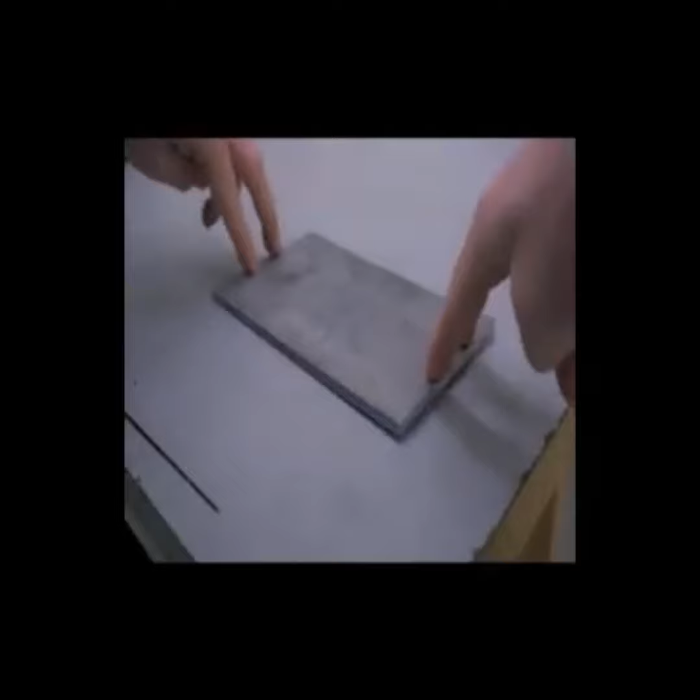First of all, the stock wasn't straight to begin with, but I could bend it back into shape with some clamps. But then I picked the wrong drill bit size from the tapping set and now have M5 through holes instead of threads. What a bummer. I think this is still usable, I just have to use nuts on the other end now.

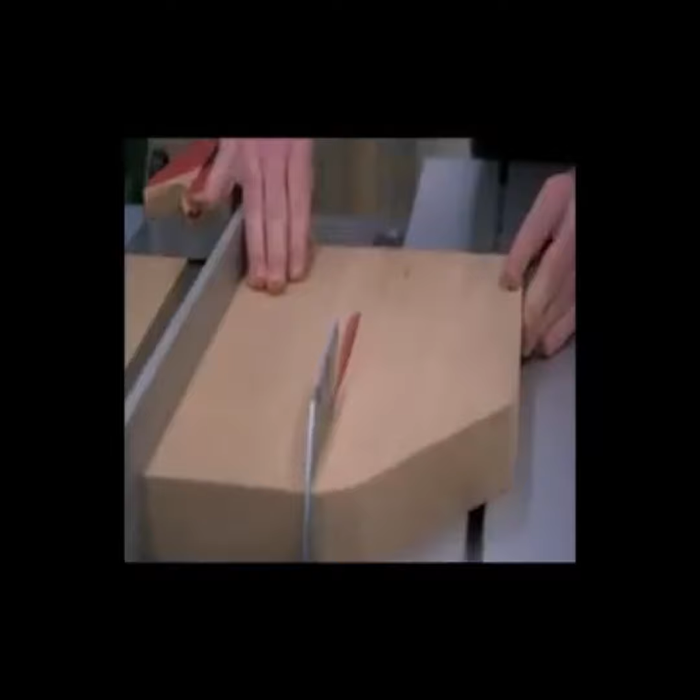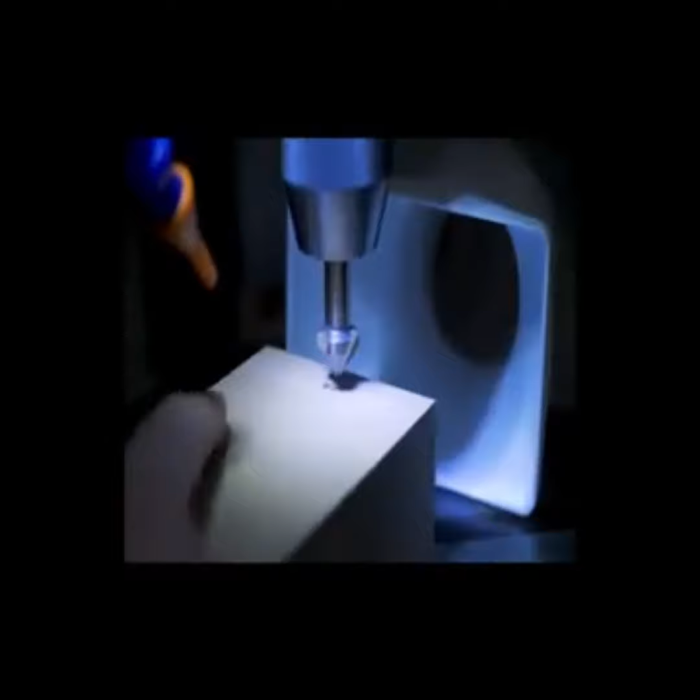By accident, I got this perfect match of frame rate and RPM on the drill press, making it seemingly standing still. This looks weird, like just pressing the bit into the wood. And same with the chamfering bit. Recording this was pretty cool. Finally, chamfering the edges, and these pieces are done as well.

With all these parts done, it's time for the first assembly. I start by joining the rails end to end with the big steel plate to make a long one. To align the rails, I use one of the blocks, slide that halfway over both rails, and tighten the bolts.

Now this is by far not the smoothest of transitions, and definitely not the intended way of doing that, but for my camera gantry purpose, this should be fine. So far so easy. Now mounting all this to the ceiling.

I first measured and marked the ceiling center, drilled one hole for the big steel plate and screwed it down, or rather, up. Then I could measure the distance from both ends to the wall and rotate the whole thing around the first screw to adjust it parallel to the wall. By the way, I did this whole installation together with my dad, some nice dad and son shop time.

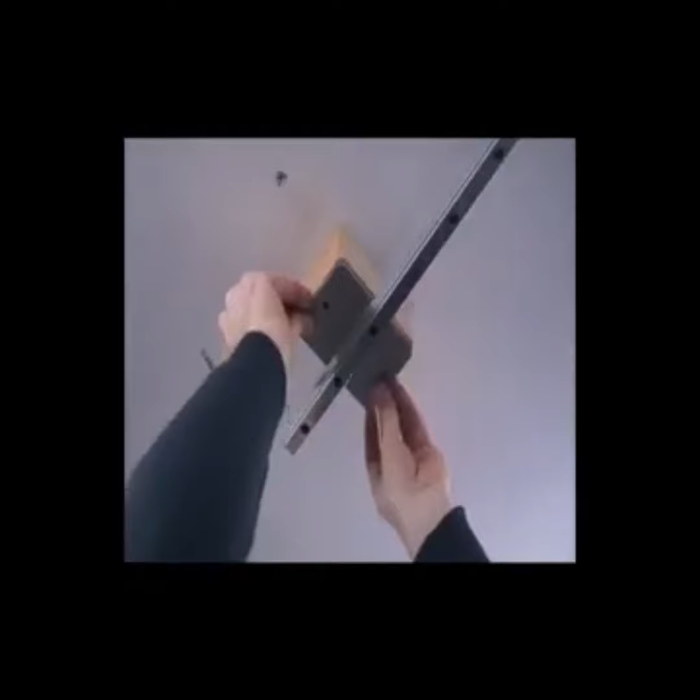Next is securing the ends. We had a nicely questionable clamping setup to press the plate and spacer against the ceiling. It worked perfectly for starting the holes. And here it's essential for the holes not to wander and be at the exact location. In concrete, I found this works best to start the hole with a regular drill, then switch to the hammer function and then switch to a rotary hammer for the hard work.

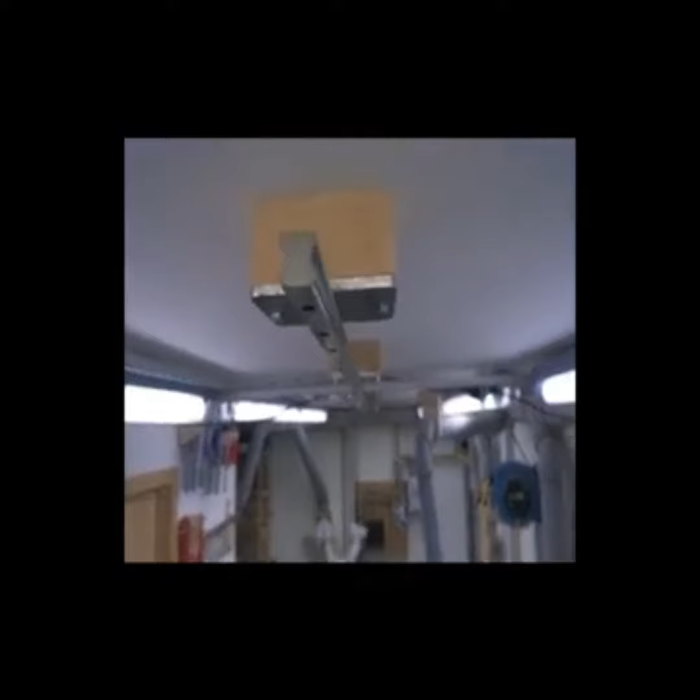After securing the ends, we mounted the other steel plates the same way and finally the second center screw. And now this rail is up there for good. Ouch. Ouch. Ouch. Also, this ceiling is amazingly straight. I didn't have to change any of the spacer blocks. And so the transition in the middle now is basically flawless.

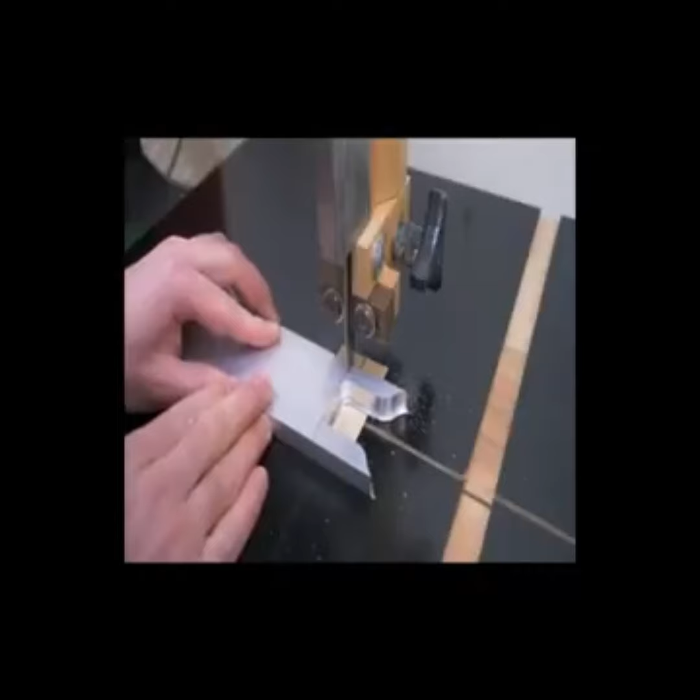Next is making an aluminum plate to mount the two blocks to. I had some leftover bar stock big enough for this purpose. I just cut off the other project leftovers and cleaned the edge on the bandsaw. Then marking the hole placement and drill pressing them, you know. And after some more chamfered rounds and deburring, this part can be installed.

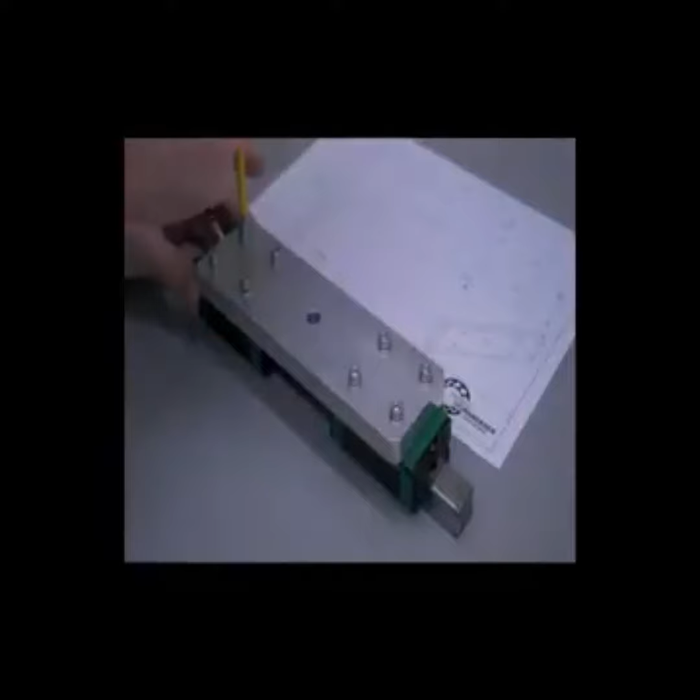I have another short but identical rail, so I don't have to do this over my head. From there I can slide it onto the long rail and test it out. Nice. Whee! Next I need to make a shaft. Everything else will hang and rotate around this shaft, so I want it relatively beefy and accurate.

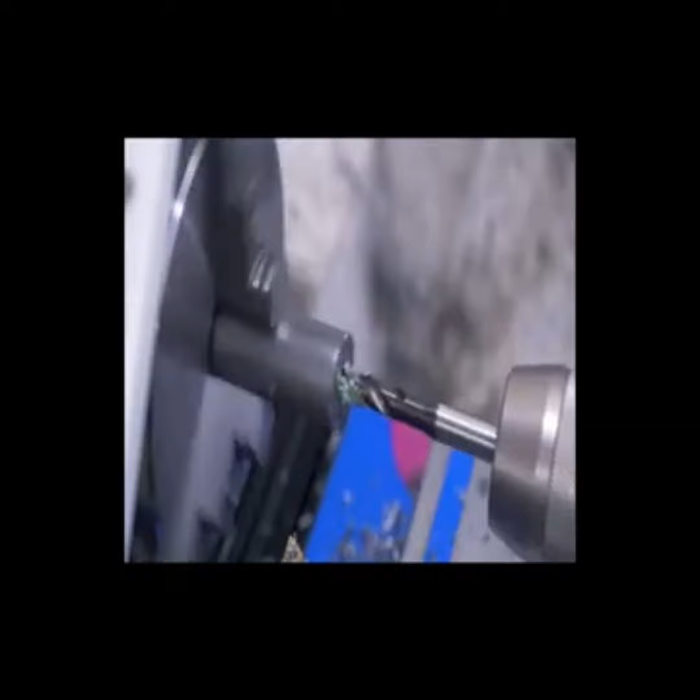So it's on to the metal lathe, where I first face the end of some stock, center drill and drill and tap M10 threads. First time I tried power feeding this tap size. Pretty cool, but being a blind hole I finished by hand. I then cut it to rough length, leaving it long enough for proper work holding.

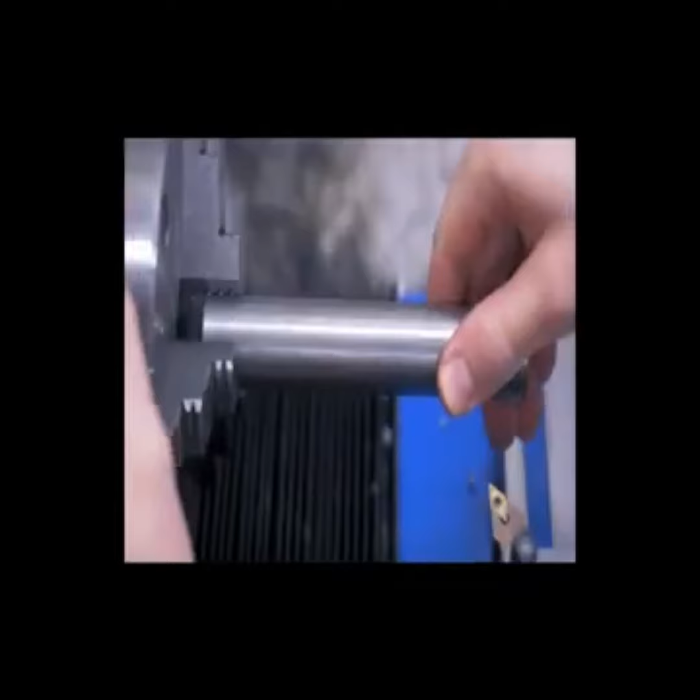The other side gets an extra big center hole drilled, so the live center still makes proper contact after I cut the M8 threads there. Then I chucked a piece for turning the diameter down and marked where to roughly stop.

I want the whole length really accurate, so I better check the tailstock alignment by comparing the diameters at both ends. I see 2 100th mm variation. Not bad, but after a few adjustments I made it much worse and then got it to 5 microns variation

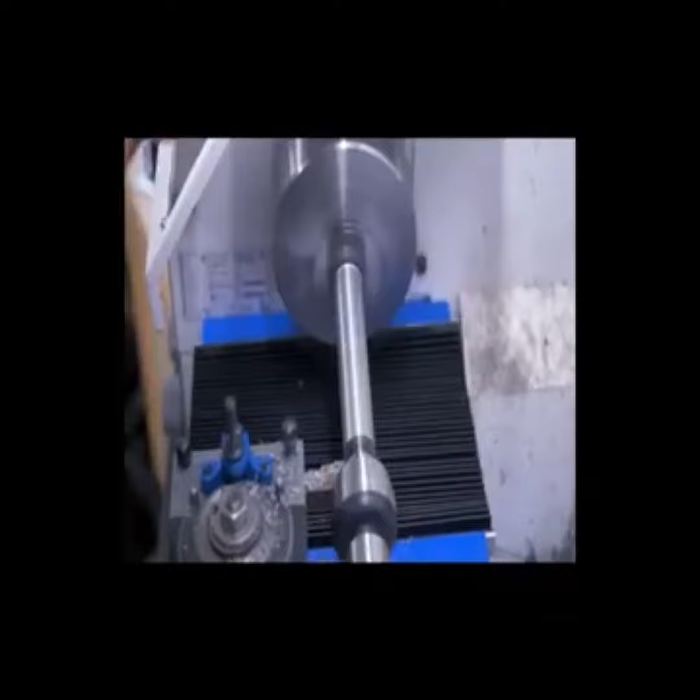and went with that. Then it's a bunch of hogging away material, but before the final passes and measurements I let the part cool down again and then sand it to my required dimension, which I undershot by 1/100th. Bummer. But I can account for that when I turn the bushings that will fit this shaft.

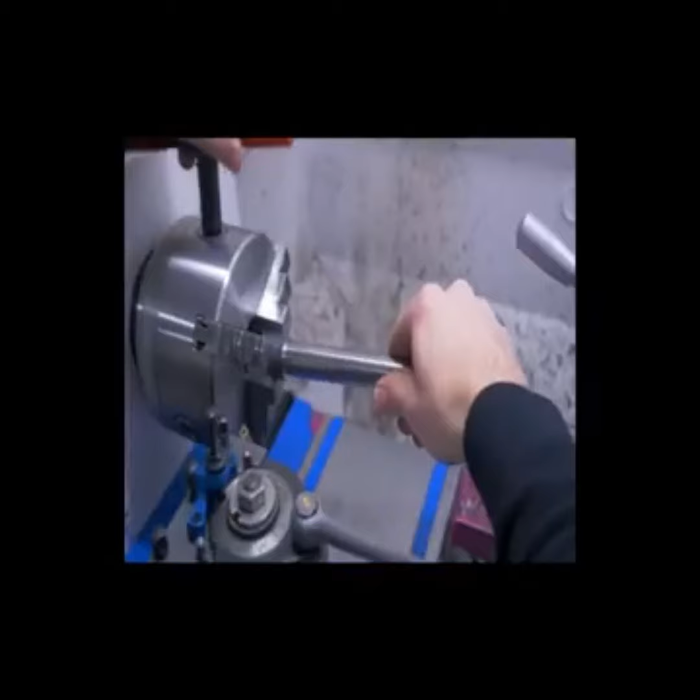So then I could face the shoulder to final length, add chamfers, and flip the part around to cut off the extra material and finish up this side as well. And there it is, a shaft.

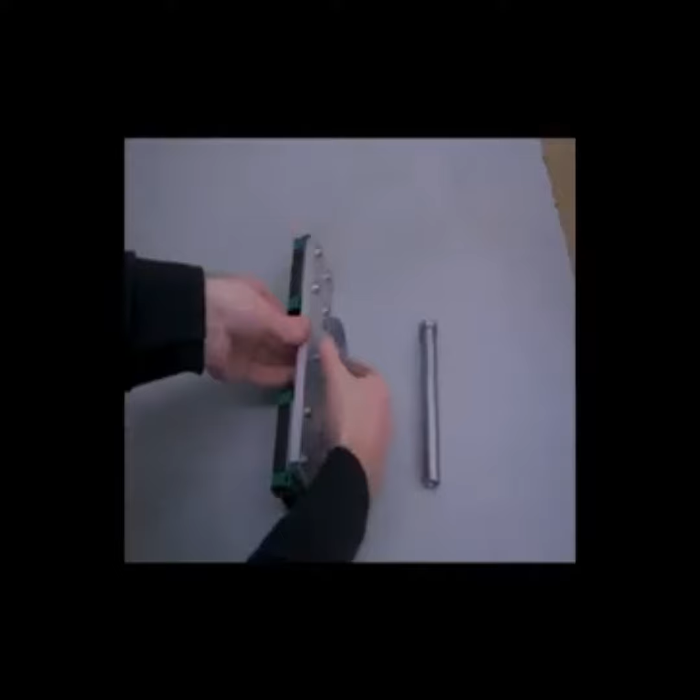It now gets bolted to the aluminium plate with the blocks, but to better spread the clamping and bending loads this part will see, I also turned a thick washer which goes in between both parts. Let's do it properly. This M10 bolt needs 48 Nm of torque. And with that, the rail assembly is complete.

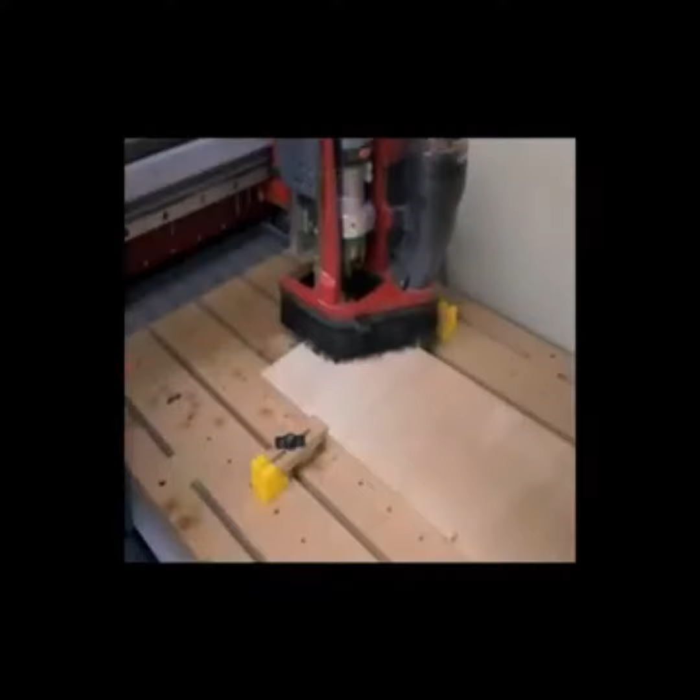So moving on with the boom arm assembly. This requires both wooden and machine parts. Let's start with the plywood parts that fit the shaft I just made. I cut the main shape of them with the CNC router, cause that gives me the best accuracy for the hole locations, and leftover hold-on material gets removed with the trim router. All done with unnecessary drawings.

Now these pieces receive some bushings that precisely fit the shaft, so back to the lathe where I faced some more stock, drilled out some material with the biggest drill I have, and then turned the OD to a press fit in the wood with a little shoulder.

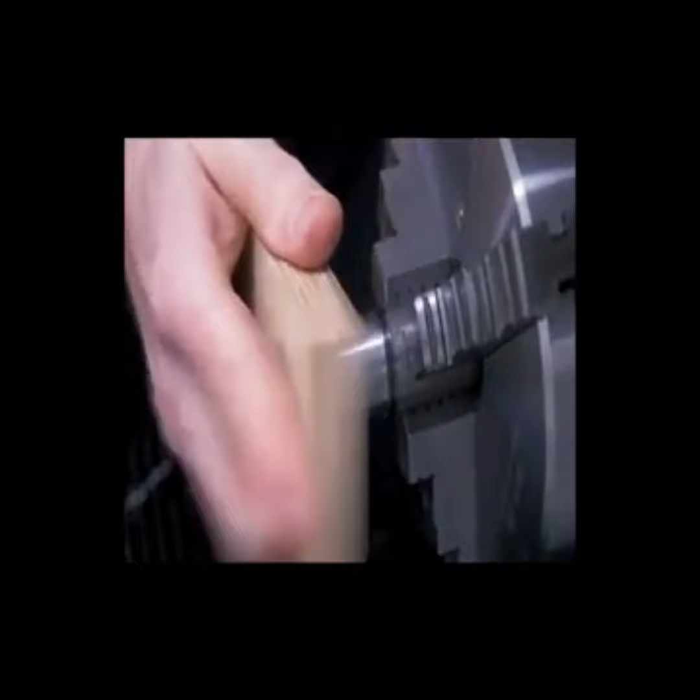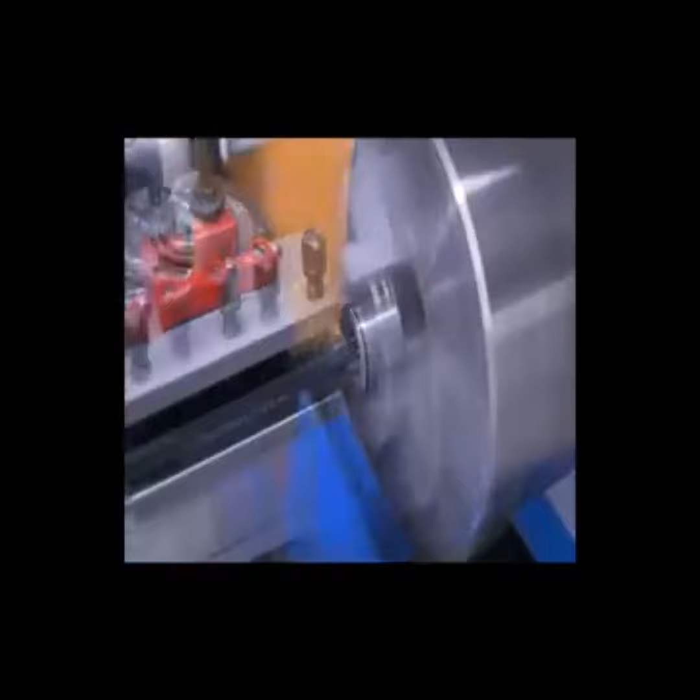I cut it off now, flipped it around in the chuck, faced this side and opened up the ID. I did it like that cause turning a through hole is much easier than a blind hole. When I got closer to dimension, I checked the ID with a telescopic bore gauge after every pass and again sanded to final fit. Another reason why I needed the through hole.

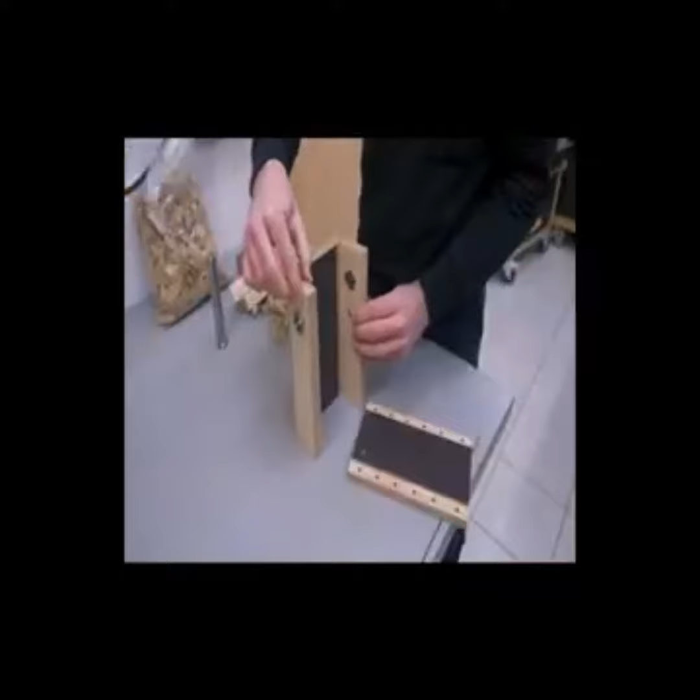Oh nice. Some deburring and the part is finished. Of course, I made 2 of them. I pressed them into the wood, dry assembled the rest, and inserted the shaft to see if it still fits.

Rubber bands seem to be the best option for clamping, as they clamp all parts evenly. With regular clamps, the parts shifted ever so slightly, causing the shaft to bind up. That didn't happen with the rubber bands. So then I did the same thing with glue, but using more rubber bands for more clamping pressure. The next day I could remove the rubber bands and test the fit again.

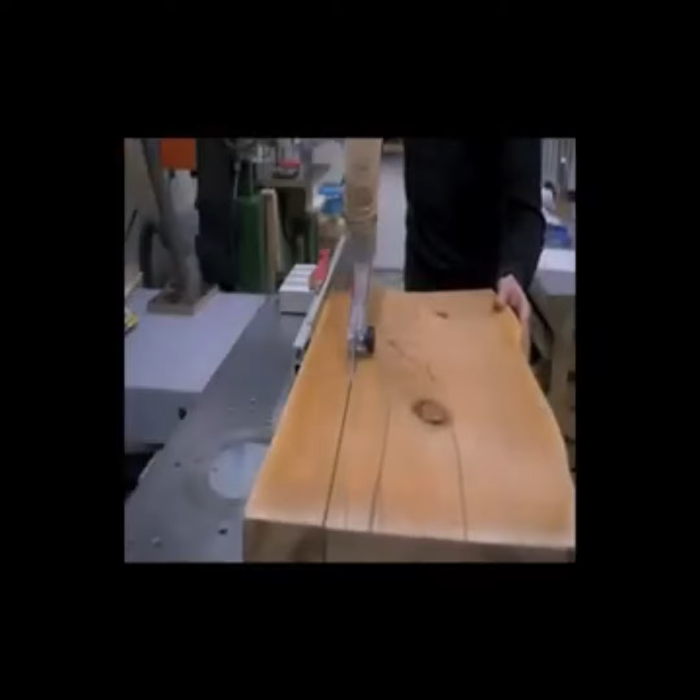All the holes are for reinforcement dowels, which I first drilled to depth and then glued all the dowels in. While that's drying, I can work on the wooden boom arm. I cut a slightly oversized piece from a bigger board, jointed one face and edge, and planed it to thickness until it fit the other part. The width I cut on the table saw, and then this goes together nicely.

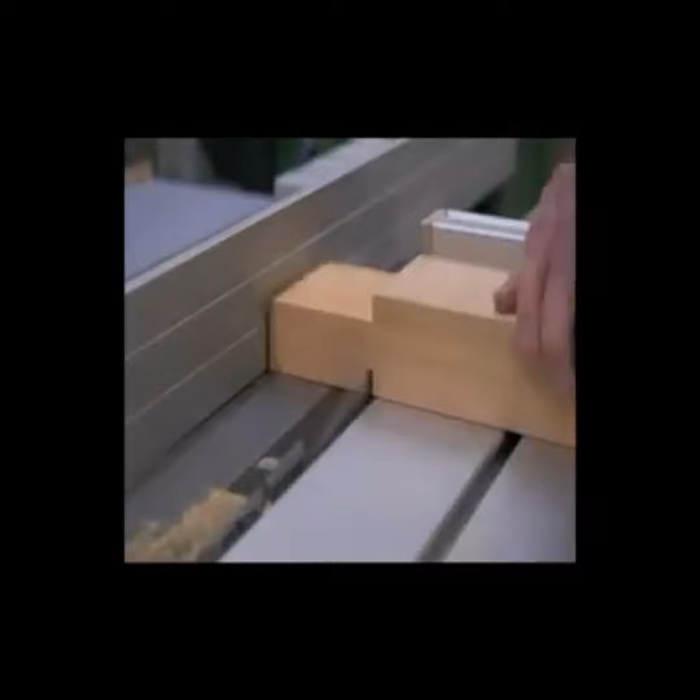So let's take this for a test spin. Perfect. It rotates smoothly and clears everything. Now this boom arm needs some more work. I set the table saw fence to guide the piece for cutting a big tenon with multiple passes, and the other end gets a little wedge cut off.

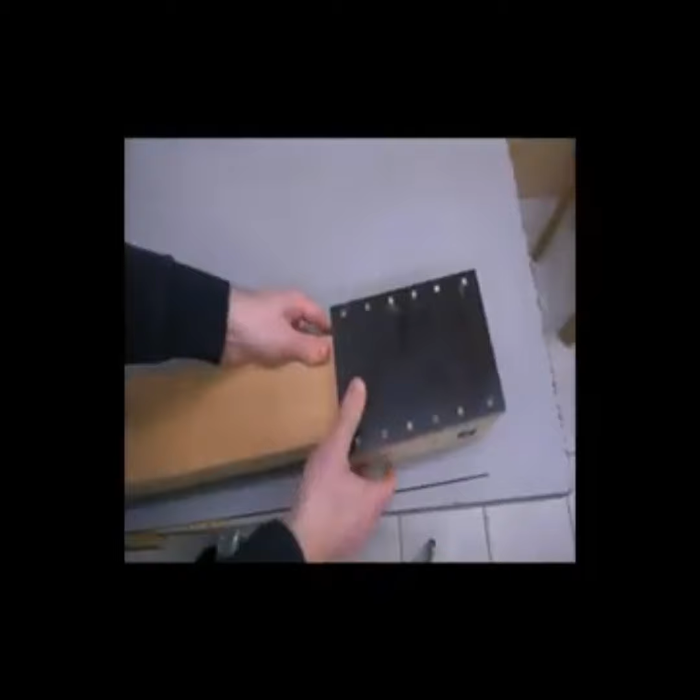Then I align the hole positions with the existing holes and drill all the way through. Here fits a pin which allows the whole boom arm to pivot a little bit, and a bolt on the bottom lets me adjust that. Take a look. Now this is the neutral position, and when there's a lot of weight, this arm will flex down a bit, and by tightening on this bolt, I can lift it back up.

I then made a nicer pin with threaded holes, and some more screws will lock the adjusted position of the arm. Next is the vertical part, which will be glued to the tenon. Here I jointed both faces and one edge, then drilled 2 holes. They will be important in a second.

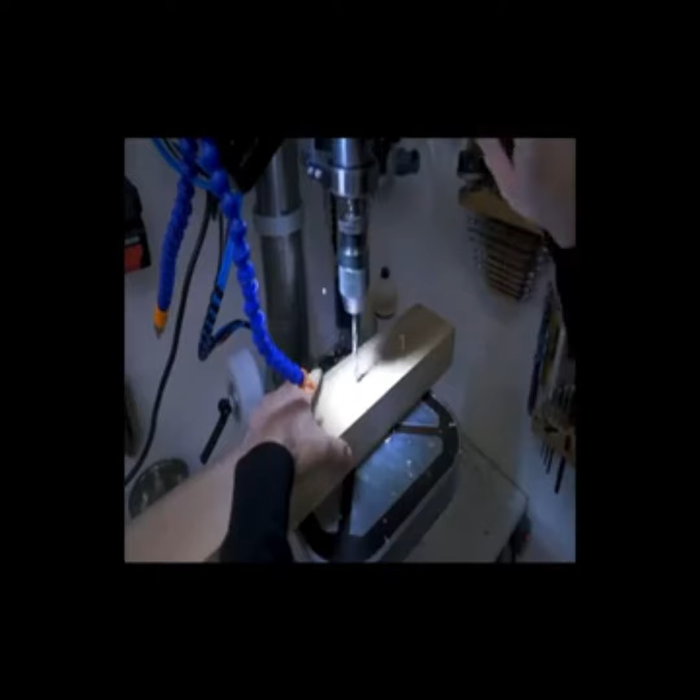But first I cut the piece in half and planed both boards to thickness until their combined thickness matches the other part. Now I can stick another pin and drill bit through the holes to align them and cut both pieces to length at the same time.

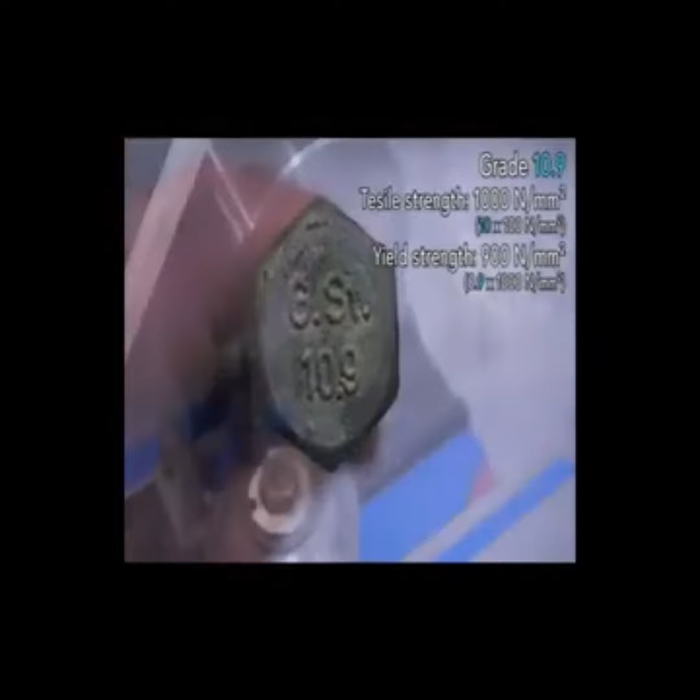With the same technique as before, I created the matching joint for the tenon. Pretty cool method to create big, precise wood joints. But I actually did this for a different reason, because on the bottom will be another shaft, which I'll turn from an M20 bolt that I got for free as leftover material. It's grade 10.9, which means it's pretty tough, but shouldn't be a problem for carbide inserts.

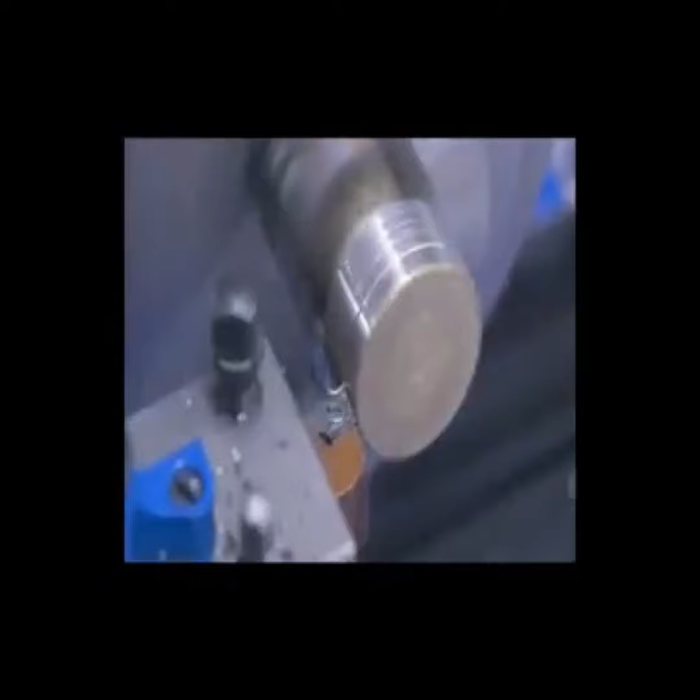First, I needed to turn off the hex shape so it fits inside the headstock spindle. And I know interrupted cutting isn't the best for carbide inserts, but they are still cutting tools and I need that hex shape removed. Next, I flipped it in the chuck to again make a big center hole and drill and tap M8 threads. Then I chucked it with the live center for the main turning.

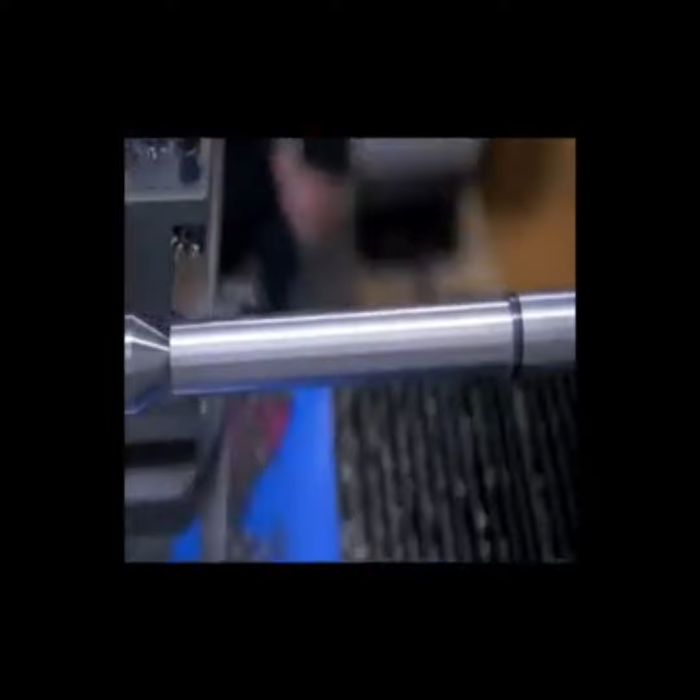The bolt has some wobble and I first turned the whole length until I got a continuous cut. Then I again marked the length of the accurate section and started turning down the diameter. Due to the threads, I couldn't quite reach my initial target diameter, but I managed to get the whole length consistent within 1/100th of a millimeter.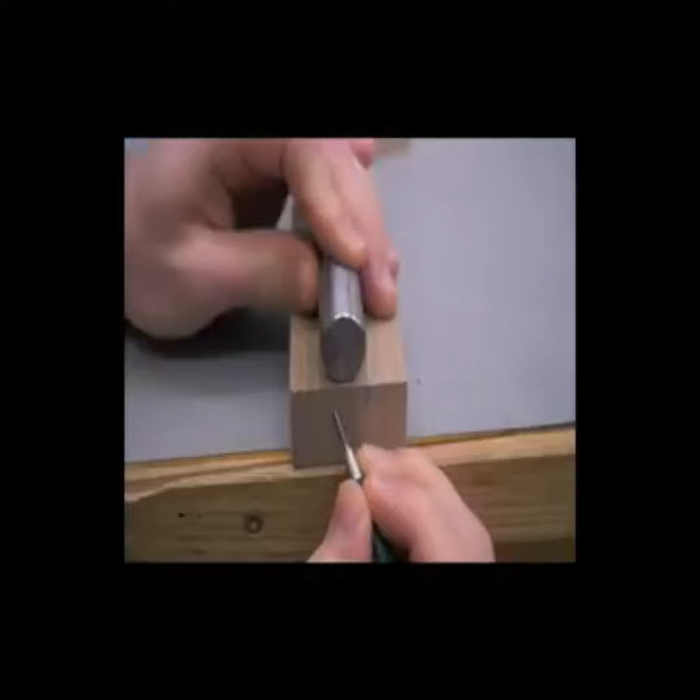Pretty cool. Then I turned the shoulder to final length, added chamfers, and turned the other side to the same diameter as the rest. And finally, I file a flat on the part for drilling and tapping M6 threads across. Now in an ideal world, I could cut a curved channel perfectly matching the shaft. But a trim router cuts a square channel and that also works perfectly fine.

I added a second threaded hole in the shaft, transferred the hole positions into the wood and drilled through holes for the mounting screws. Ah, slotted screws. The best invention ever. Everybody loves them. And now the boom arm is ready to be glued. First one of the joint surfaces, which I let dry for an hour, then the rest. Again using the pins for alignment, and later I plug the holes with a dowel. This now completes the boom arm assembly.

Then I greased the shaft and the bushings, slid it on, and secured it with a brass washer and a little cap I turned. Oh yeah, it's taking shape. And despite this smooth movement and the big leverage, it still feels pretty solid here. Also the reason why I wanted these close fits up here, because a tiny amount of play up here leverages to a lot of play and movement here. But like this, I'm pretty happy.

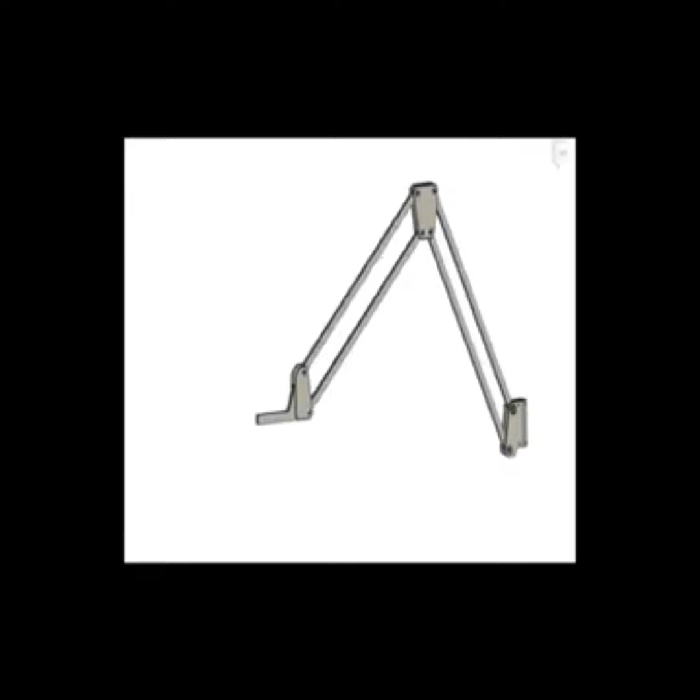So now comes the last assembly, the parallelogram arm, which is quite similar to before. I cut all the wooden parts on the CNC router. Then again, I need to turn steel bushings that precisely fit the second shaft, which shouldn't be a problem. First, turning the OD to a press fit in the wood, then cutting it off, and turning the ID to dimensions. However, this time I wanted to try something different. Grinding the ID to size with a Dremel tool.

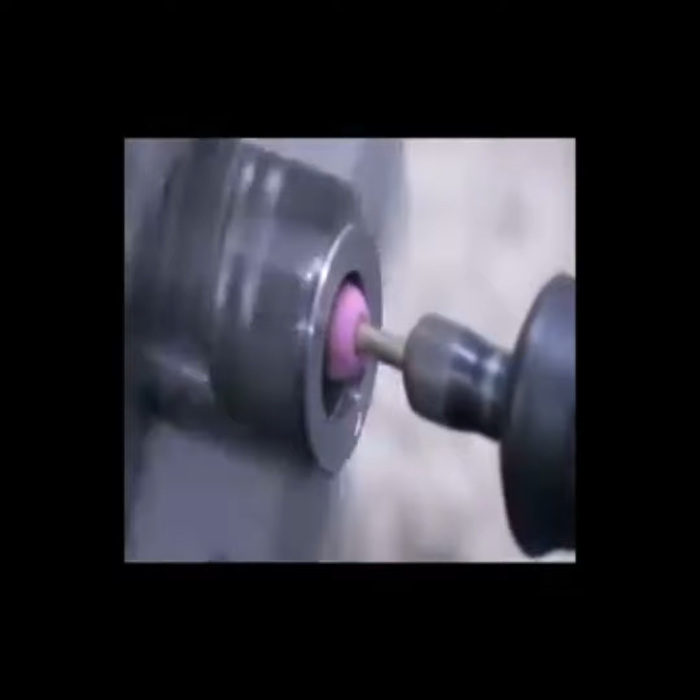For that to work, I needed to rotate the tool post by a couple degrees, spin the lathe in reverse, scratch the surface, set a couple hundredths cutting depth, and here we go. I'm genuinely impressed how well this works, feeding all the way in and all the way out again. After 3 passes, I got this. A slip fit with 1/100th play. I couldn't have asked for more. I pressed them in and continued with the remaining wooden parts.

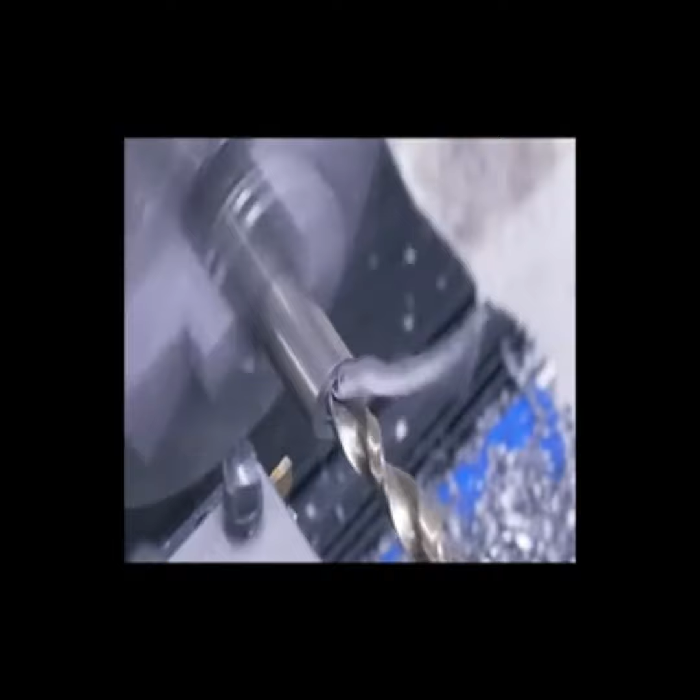As you may have already guessed, these holes also receive a simple bushing. But this time I had a bit of a production setup. In the first setup I used the tool as a stop, then drilling the hole, finish the end with 2 light passes, adding a chamfer, cut the piece off, and repeat. In the next setup I used a spacer to position the piece in the chuck and finish the second side plus a chamfer. And then I opened up the hole with a boring bar to be the right size for reaming, since I don't have the right size drill bit for that.

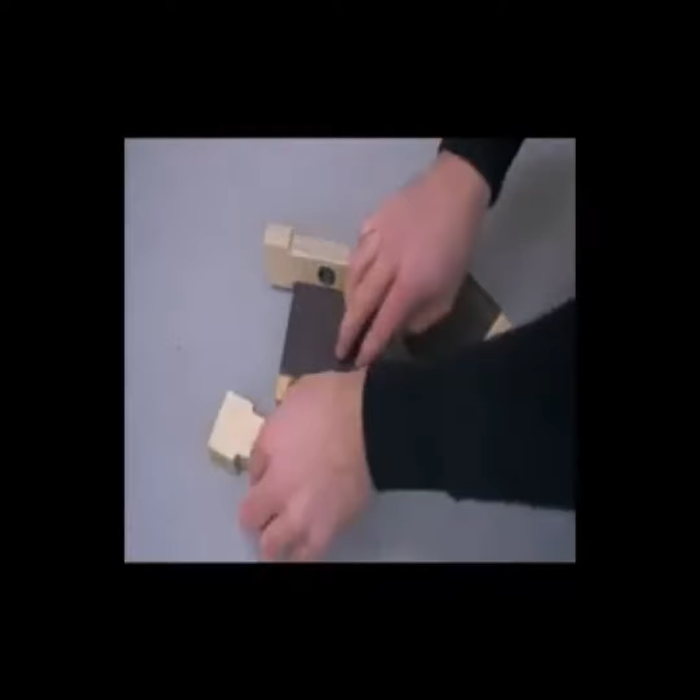Now, why did I use 3 setups for a simple bushing? Well, I needed 32 of them, and they now all get pressed into the remaining wooden parts. These parts have location features machined into them and align the bushings and clamped together like this. The main shaft fits nicely, as well as the shoulder bolts.

So then the same thing with glue again. Since nothing was binding up with clamps, I didn't need the rubber bands. And this also got some reinforcement dowels.

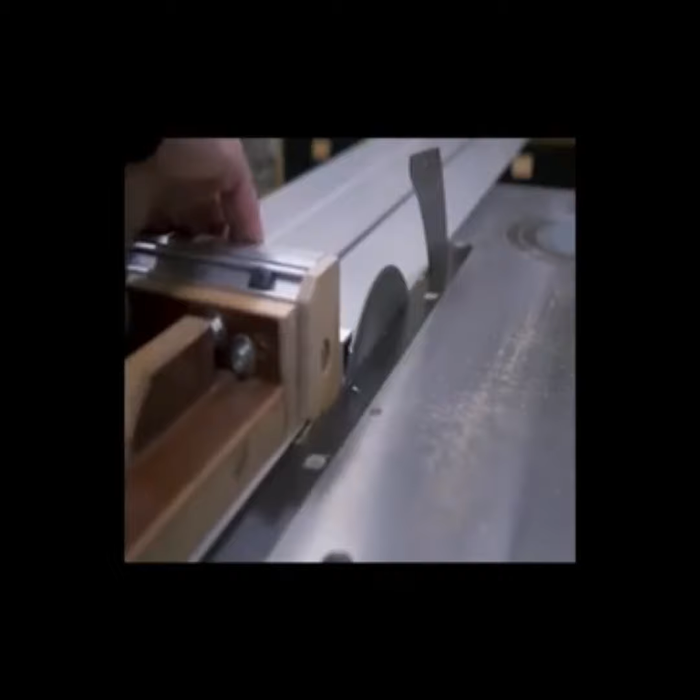For the parallelogram arms, I bought some square aluminum tubing at rough length. At the table saw, I cleaned the factory edge and then cut all of them to equal lengths. Well, it's better to double check the length on the drawing.

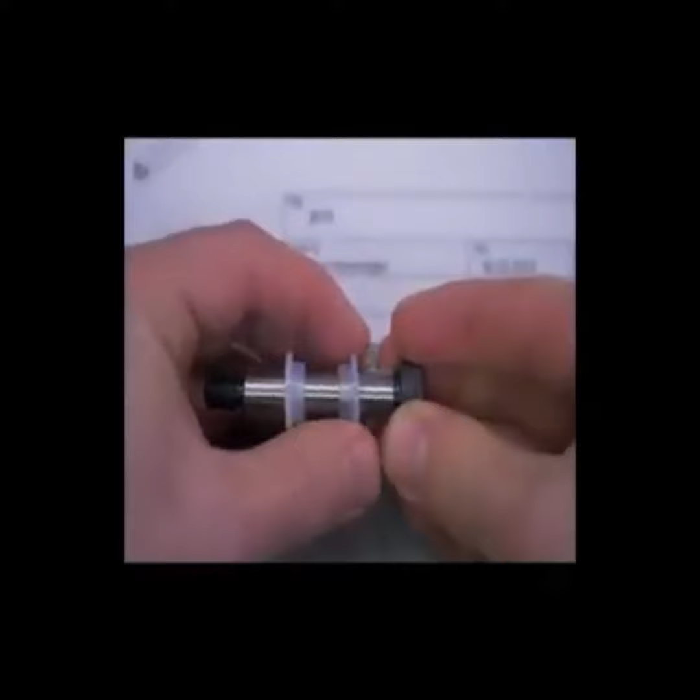What the fuck? Each end of the arm pieces will get a reamed hole for then again a bushing and a shoulder bolt to rotate on. And to get this nice and smooth, I got some nylon bushings. But as you can see, these are not precise. Their ID is about 3/10 larger than the shoulder bolts. I won't accept this with the other tolerances of this project. So once again, I'll be making my own bushings.

I use some POM round stock I have from a different project and again make some kind of a production setup. Register against the tool, facing, drilling, and reaming. Then I insert a precise pin I made to prevent the hole from deforming or collapsing while turning the OD. This stuff is a joy to work with. Beefy cuts to remove material quickly and lighter passes to reach the specific dimensions. And the best part is cutting it off.

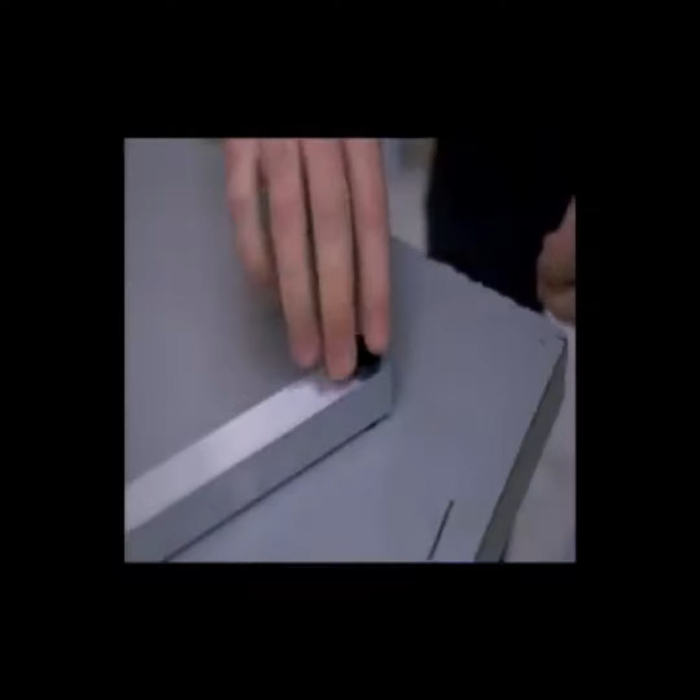With the pin back in place, I chucked it the other way to face the shoulder to thickness and chamfered the edge. For a shoulder on the other side of the bushing, I also turned washers from the same material. So I drilled and reamed a deeper hole that fits the OD of the bushings and then cut them off one after the other.

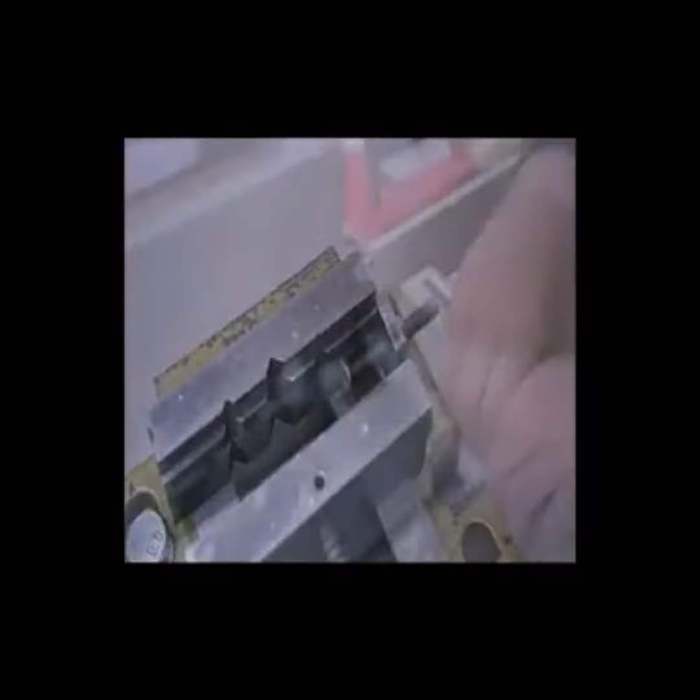To repeatedly drill the holes into the arm tubes, I modified my vice jaw to install an adjustable stop and also pressed some small plastic pieces into the arm tubes, which will help when installing the bushings and keep the square shape over time. So then I drilled and reamed the hole to press in the bushing.

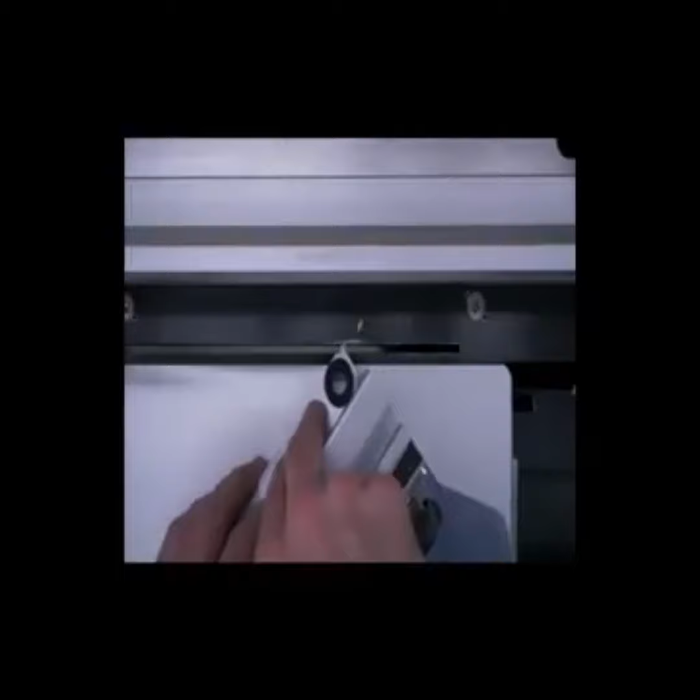And since I made this a slight press fit, the shoulder bolt no longer fits, so I run the smaller reamer through there again and make it a perfect fit again. The other end gets the washer, and that's it for the bushings. For clearance and aesthetics, I cut off the corners before I could do the rewarding assembly.

So far, so good. It can't support a lot of weight at the moment because I haven't added springs yet, but this feels nice and smooth. There's no play in the joints. I can easily reach the ceiling now, and when it's fully extended, also the floor. And then I can fold it together nicely into the arm, just like I planned.

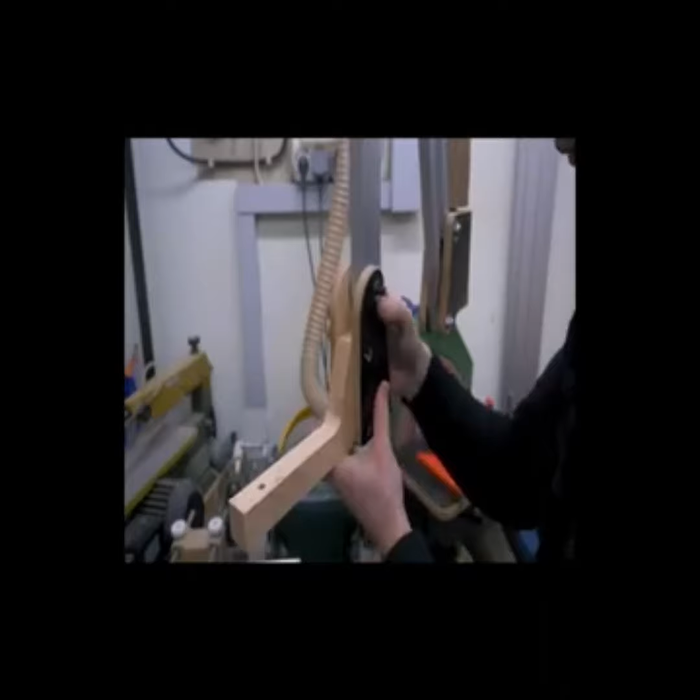I quickly made the camera mount from some hardwood, screwed it to the end of the arm assembly, and mounted my tripod head. Since I only have one camera, I have to simulate the weight for setting up the springs. They get hooked onto some pins, which I forgot to record making, but it was just some more lathe work. One replaces a shoulder bolt, the other mounts to an arm.

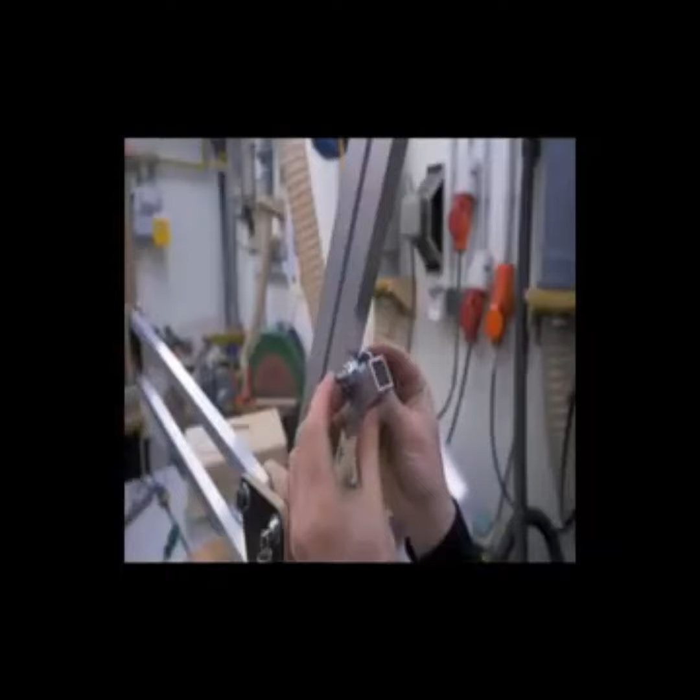And with the arm offcuts, I could clamp it at different positions and figure out the right tension to support the weight in every position. This required varying the spring tension and the friction in the joints. With the springs now set up, it can hold the camera weight in the fully contracted position and the fully extended position, and also everything in between. So then I marked the pin positions and drilled holes to install them properly.

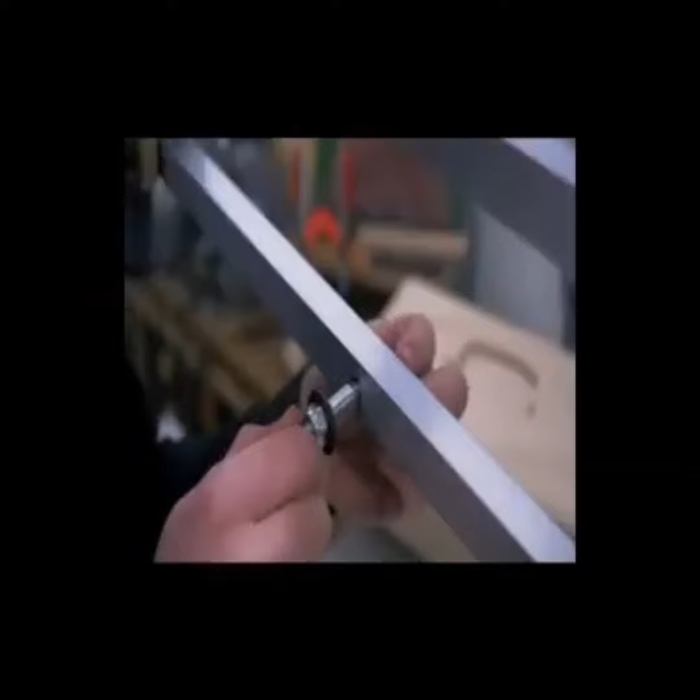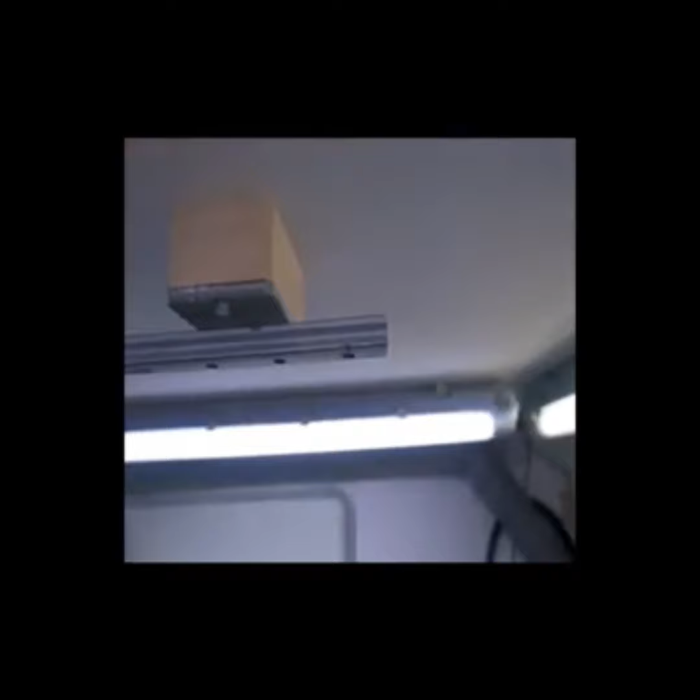Now I can easily move the camera from one scene to the next and also high up in seconds. Just what I need to install the very important end stops on the rail. An angle bracket with some wood and felt. After that, I took everything apart again to bring all pieces to final shape, round over edges, and paint it, with a very satisfying moment.

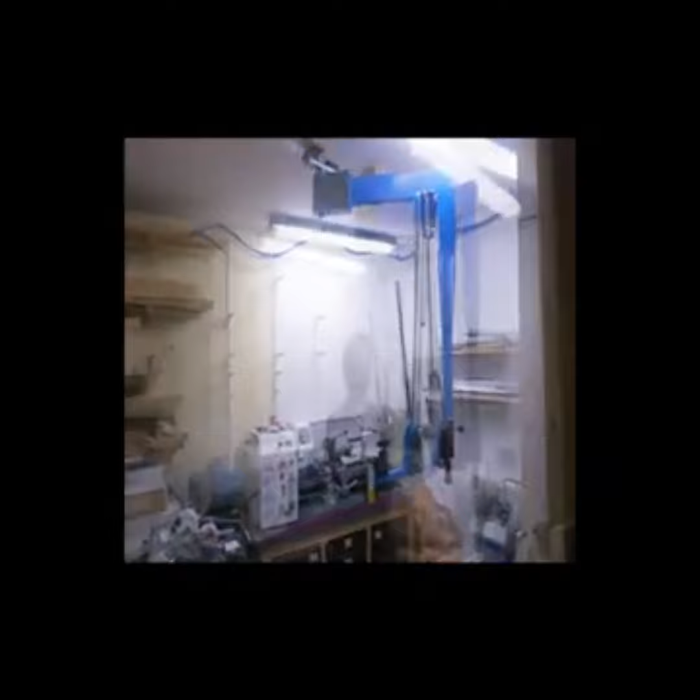I quite like how the blue color came out. And now let me show you something you probably wouldn't have guessed. Yeah, I built this thing twice. The workshop has 2 rooms, and I could do some nice changes and improvements on the second build.

I used old bearings on this and this joint, which saved quite a bit of time not having to make the bushings. But with the bearings, it ran so smoothly that it started rotating on its own. So I had to add some friction blocks pressing on the shaft, kind of acting like a brake. Now it works and is fully hidden.

The other thing is, when this one is fully contracted, I can't rotate it all the way because it collides with the boom arm up here. Here I slightly changed the geometry and it will never collide.

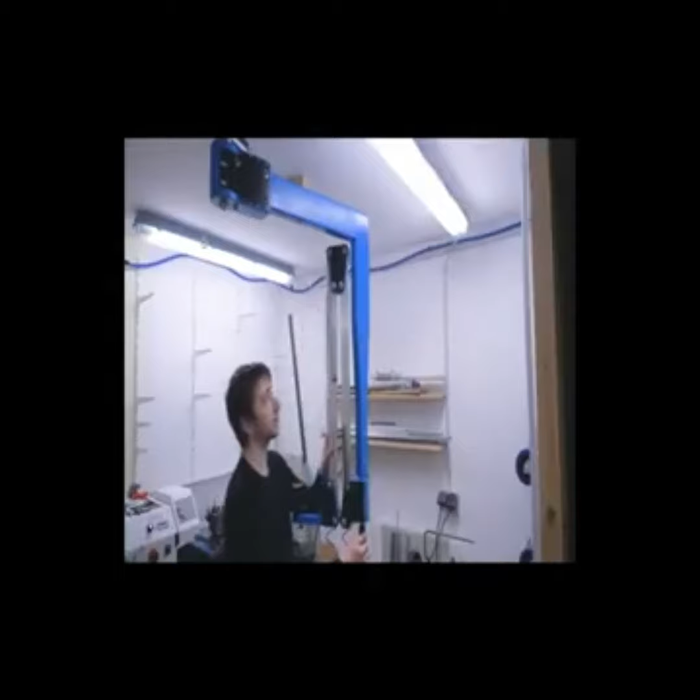With only one camera, it's difficult to show or tell you what a game-changing upgrade this project is for me. And you will probably never see it again. But it works so well and will be incredibly useful for making new videos. And on top of that, it was a ton of fun making.

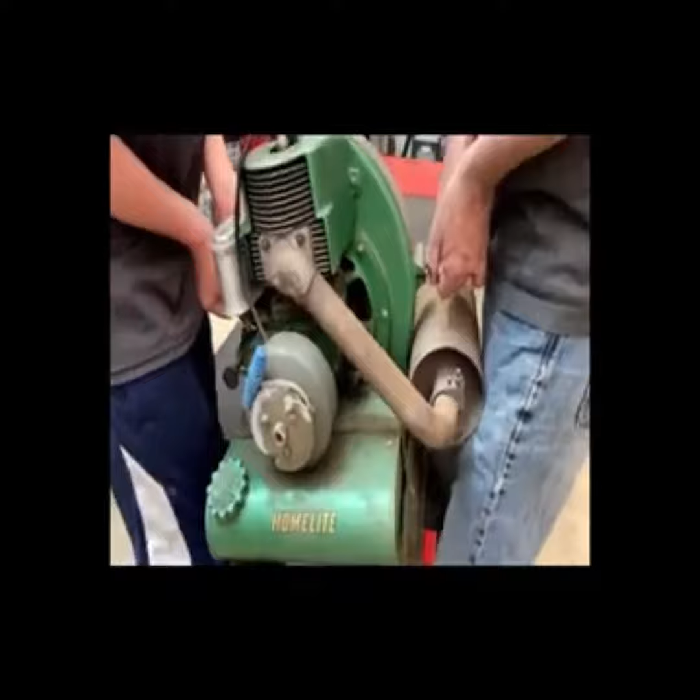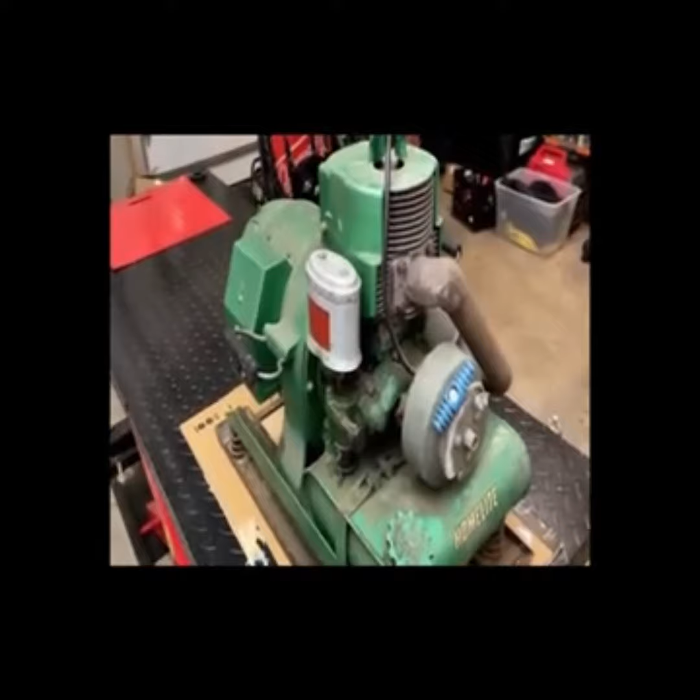Hey guys, welcome back. So today, I'm working on this Homelite 3000 watt generator. This one was given to the channel by Stanley. He found this actually at the dump. Someone had thrown it away after, I would say, a long time of storing it quite well. I haven't quite placed the vintage on it. I'm guesstimating about 1950.

From what I can tell, this 2-stroke engine was actually made by Homelite during World War II. It is a model 24A, and they sold that engine all the way up to about 1970. Anyway, this has a lot of stuff on it I'm not familiar with, so it is going to be a challenge. I did take a look for spare parts online and came up pretty much empty. Couldn't find a user manual, never mind a service manual. So I think we're on our own on this one.

Anyway, I want to check for spark and compression. This is a points and condenser, so I'm sure that's going to need a bit of work. But before I pull the engine over, I think we need to deal with what's going on in that tank. It smells really bad and is varnished up pretty severely. Someone left fuel in the tank, and the tank is not in very good shape.

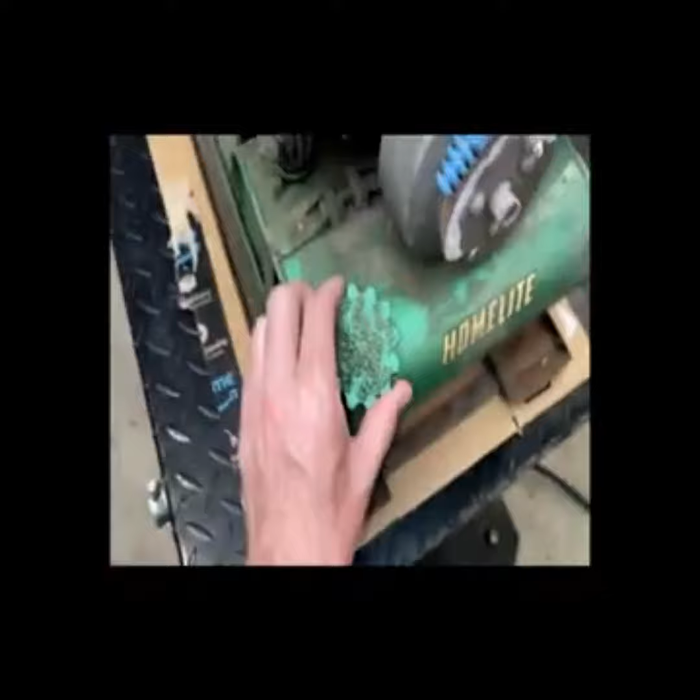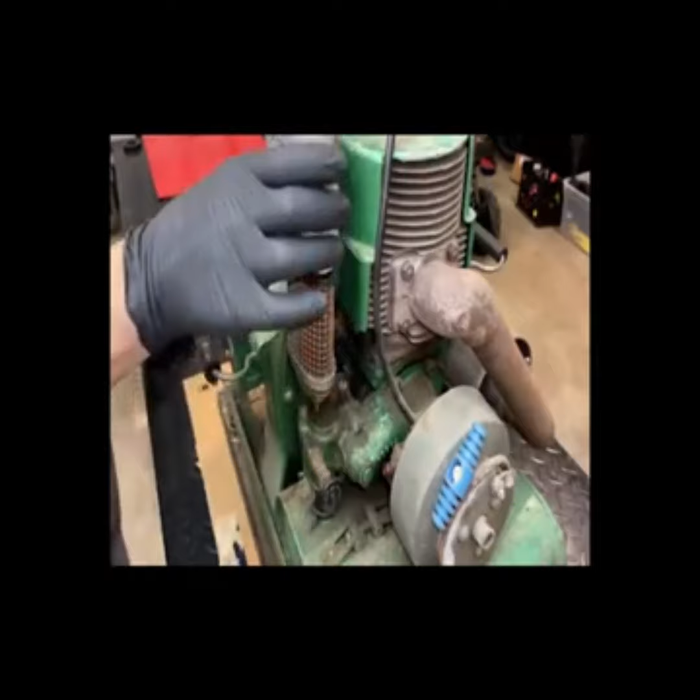And in the off chance that the carb is any good, I don't want to pull the engine over and suck that stuff into the carb. So I think I'm going to start there. Let's just get the tank and carb out of the way. We'll pull the engine over, check for spark and compression, and go from there. Looks like there might have been a pre-filter at one point around here, which is long gone. The filter is still usable.

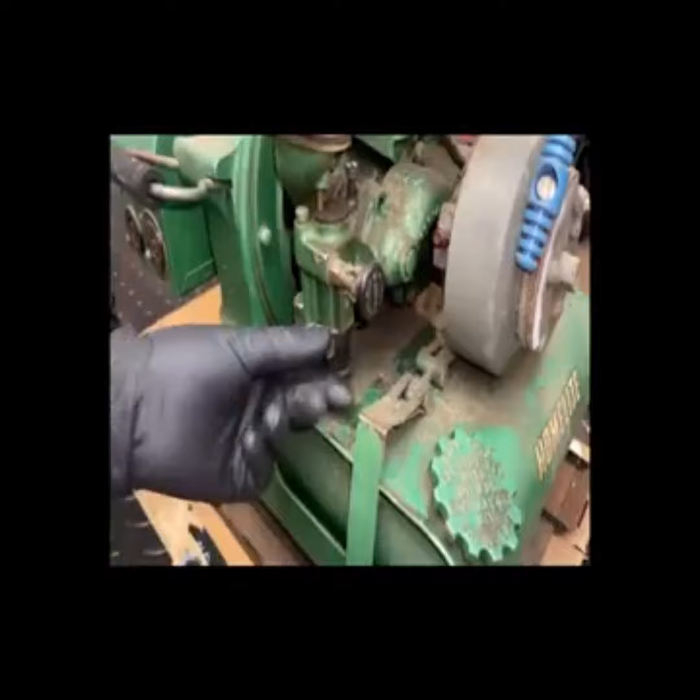Gonna have to be very careful here. This tube, it is very petrified. Usually I would just cut something like that off and replace it later. In this case, I'm not so sure that's a good idea. Replacement parts, they're nonexistent. And also I believe there are some pickup tubes coming down from the carburetor into the tank, and I don't want to damage those either.

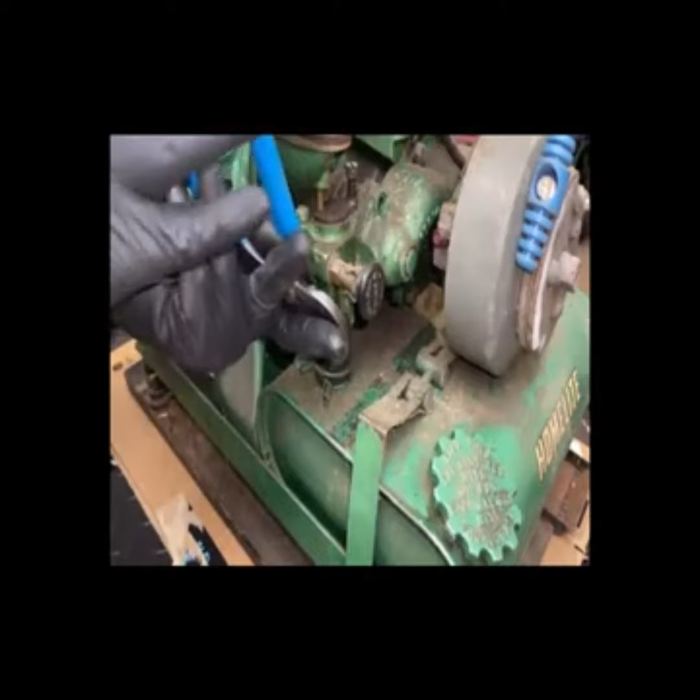So I'm gonna try to move one of these clips down, and then we'll see if we can pry with a screwdriver to release the carburetor from this tube. Actually, that was easier than I thought.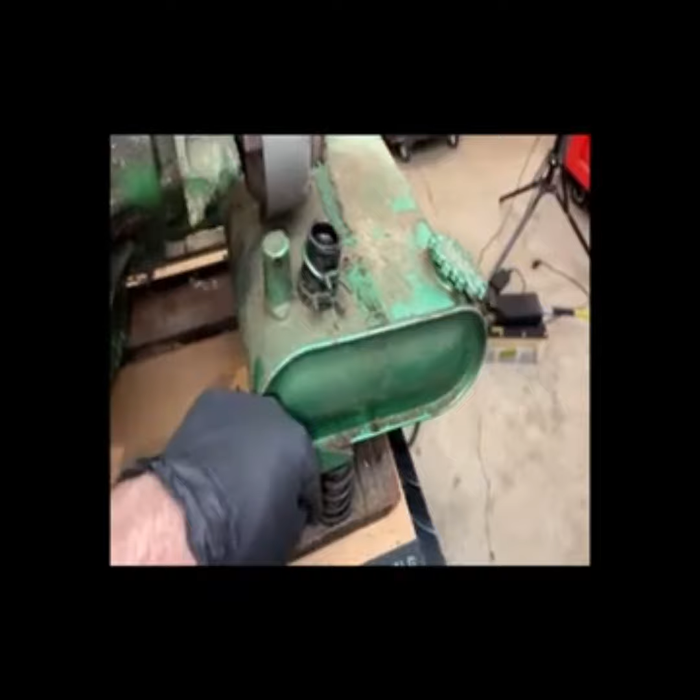I thought I was home free with this tank, and I can't get it off. Actually, the bottom of the tank isn't the bottom of the tank. Where the carburetor goes in on the top, those tubes go down actually beyond the bottom of the tank into what looks like some sort of a bowl. And that bowl is hitting this spring. So I can't actually get the tank out.

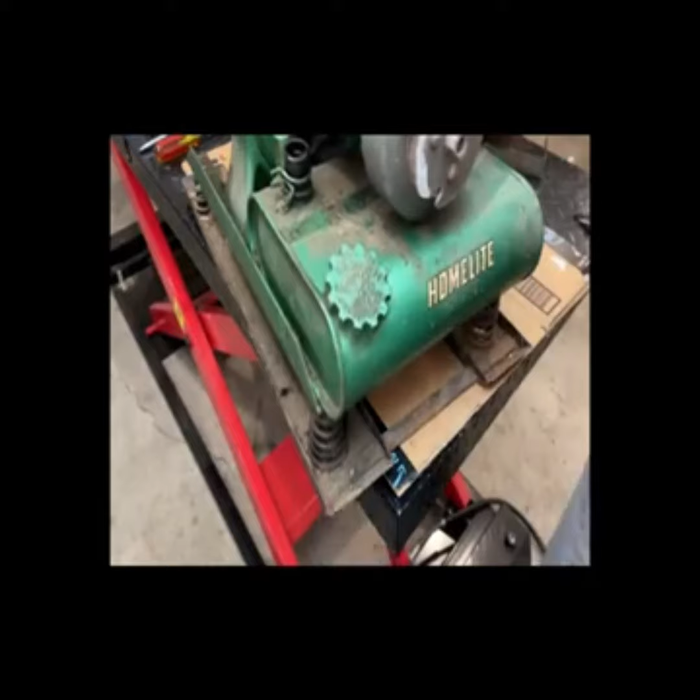So I think the best plan of attack here might be to remove that bolt for the spring, and that should allow me to get some clearance or move that spring out of the way just a bit to allow that tank to come out. This one's probably not metric. It's also not 1/2 inch. Actually, a 15 millimeter fits pretty well.

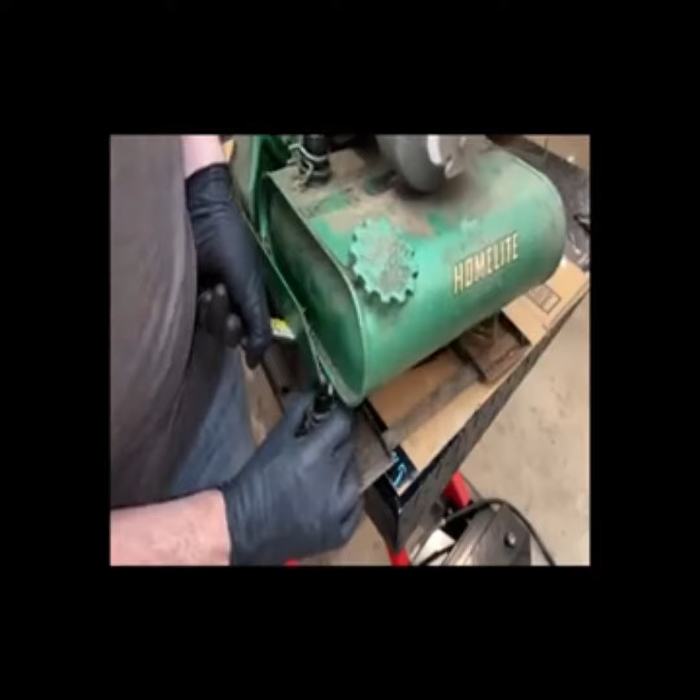Yeah, that wasn't too bad. So I'm just going to leave the tank and the carb over here for now. We'll come back to that later. For now, let's check for spark.

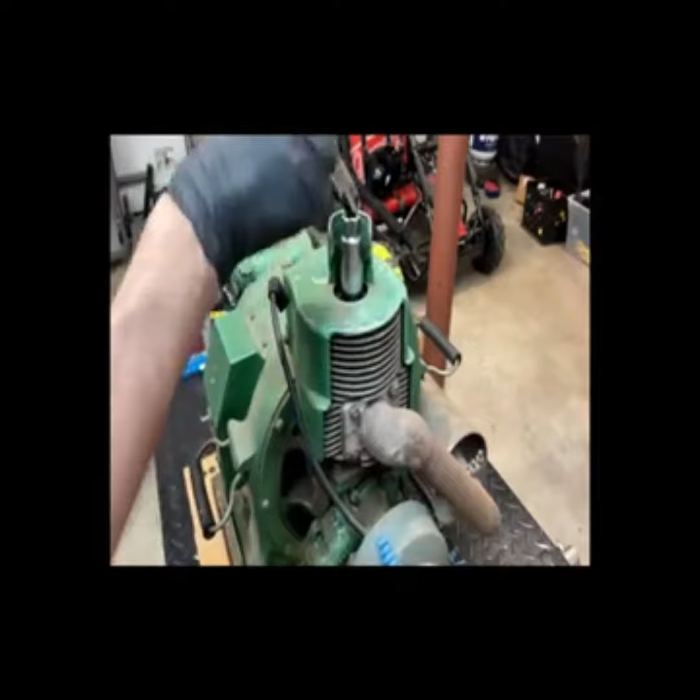So before checking for spark, let's just get the plug out so that way we're not fighting compression. And we'll also get a little bit of oil in that cylinder. You know, I have no idea how long it's been since this engine was started. Plug looks decent, no rust. Champion plug, J-6J.

Interesting. There's a little port on the intake manifold kind of squirting out some oil. So that is most likely an impulse line of some sort for the carburetor. So this might have a diaphragm pump on it, which I'm hoping it doesn't, because I'm sure that would be shot by this point.

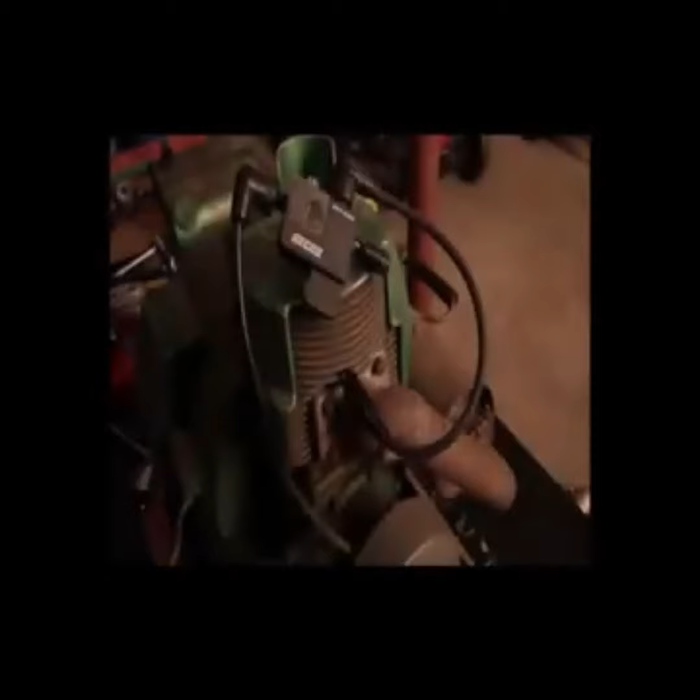All right, let's check for spark. The spark tester has a 1/4 inch gap. So if we have strong spark, which I doubt we do, it should be able to jump that gap. So let me kill the lights. We'll pull the engine over, see if we get any spark. All right, I think that's enough with the lights. We still have a bit of light, but hopefully we can see that a little better.

So I'm going to pull the engine over. This engine spins counterclockwise, which is different from modern engines. So let's see what we get. Wow. We've got spark. How? I'm not sure. Let me just pull the engine over one more time. Make sure we have consistent spark. And we do. Let's check compression.

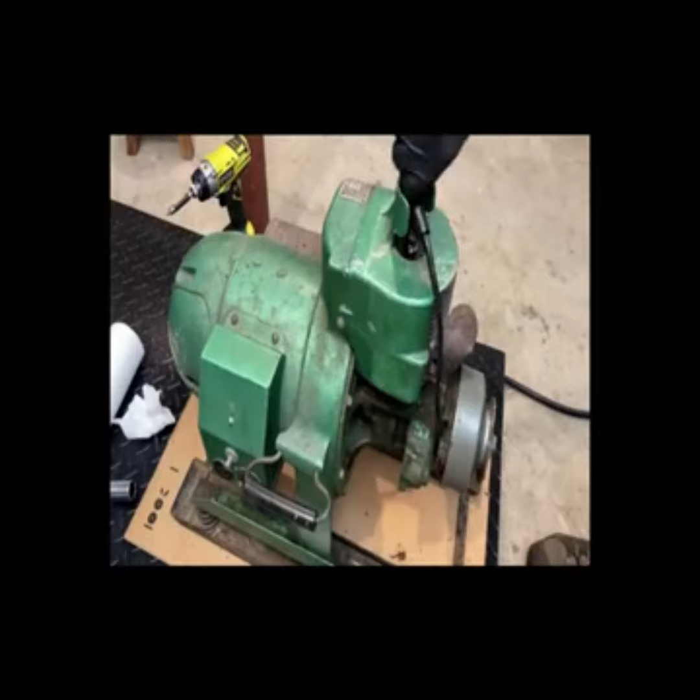So on a 2-stroke engine, I would expect at least 120 psi. It could be higher, but any lower, and I don't think it'll run very well. So let's pull it over a few times and see what we get. One pull, we're at 110. So that's pretty good. And actually this cord, I would say, is a little short. So it's hard to get a good pull on it. But let's try a couple more, see if we can get up to 120.

Yeah, just about 120 on 2 pulls. So not bad. I think it'll run. We've got spark. We've got compression. I say we add a little bit of fuel. Maybe plug a light in, see what we get.

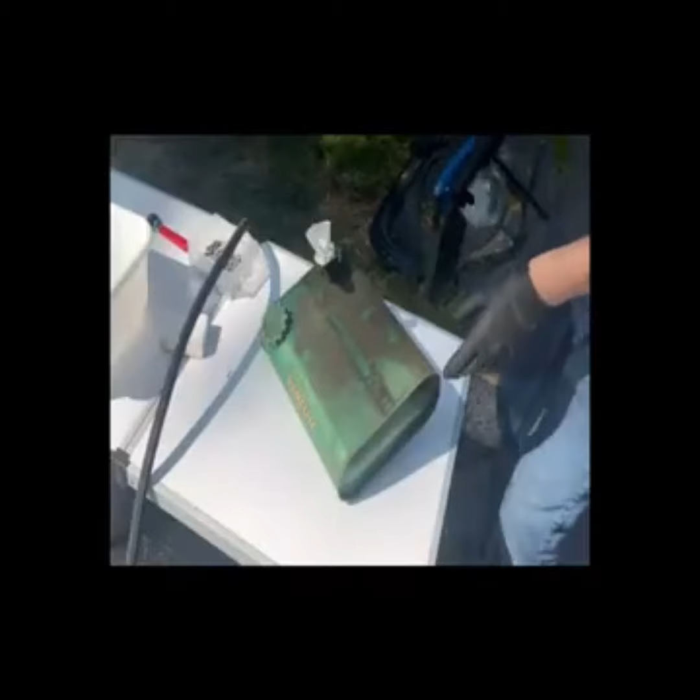I do need to get some adapters so we can adapt this to something a little bit more modern. So I'm going to order those up. And I think while waiting for that to arrive, we'll just turn our attention to the tank and the carb, see if we can't save both of those. So I think I'm going to start just by cleaning a little bit of this junk off the outside of the tank. And then we'll pour out the contents, put some nuts and bolts inside, shake it around, and see what that gets us.

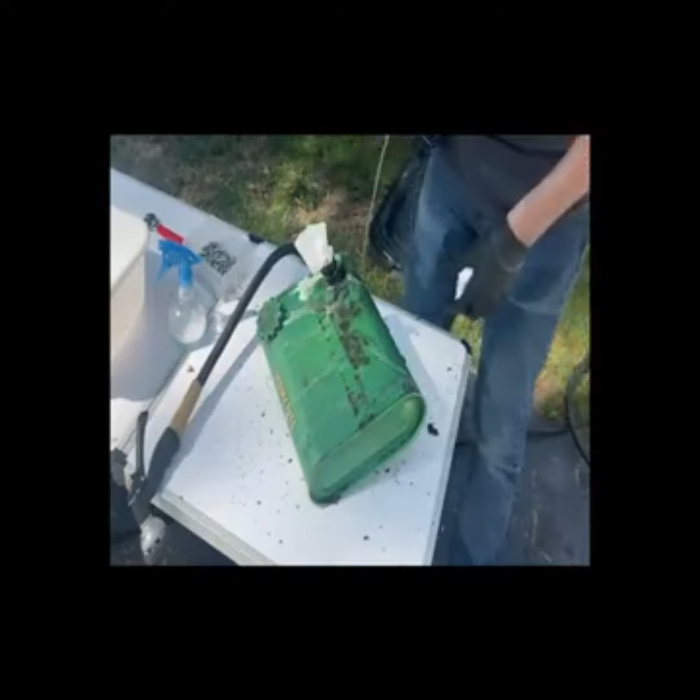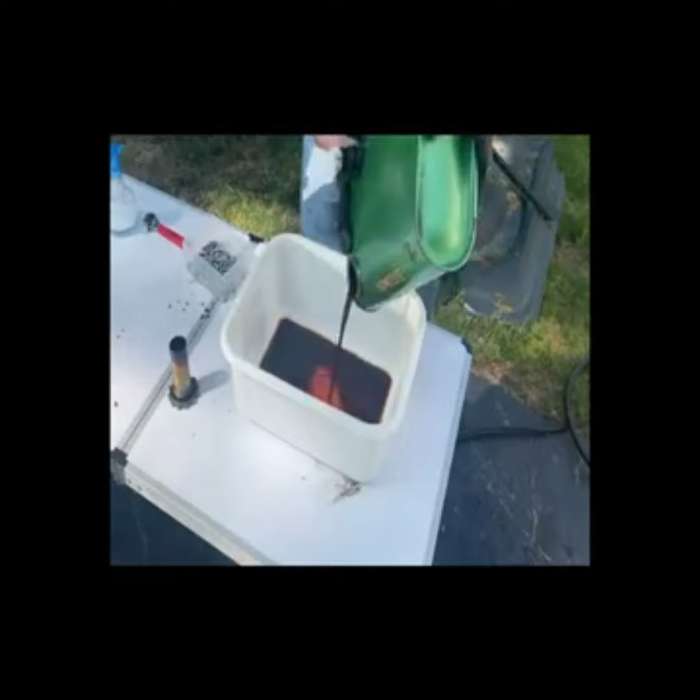I'm actually going to switch over to WD-40. A lot of this is just oily dirt, and WD-40 does a really good job of breaking that stuff up. This tank does not have a lip on it, which is good. It'll make cleaning it a lot easier. A lot of newer tanks have lips on them, so you can't actually pour everything out that's inside the tank.

And there's a look at what came out of the tank. Definitely a good vintage. But not so much for running an engine. Anyway, we can now see the bottom of the tank, and yeah, it doesn't look great. So we're going to start simple here. We'll just add some nuts and bolts, a bit of water, shake it around, rinse and repeat. We'll do that a few times, and hopefully that'll knock a lot of that rust out of there.